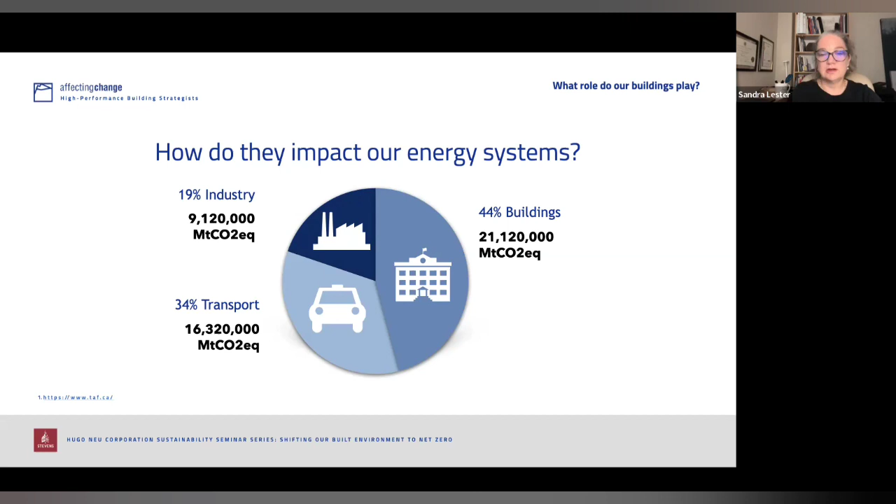If we look on a global scale, the urban built environment is actually responsible for 75% of the annual global greenhouse gas emissions. And that's the built environment itself. Buildings alone account for 39% of the emissions globally. So that's a huge building footprint, but it's also a huge opportunity.

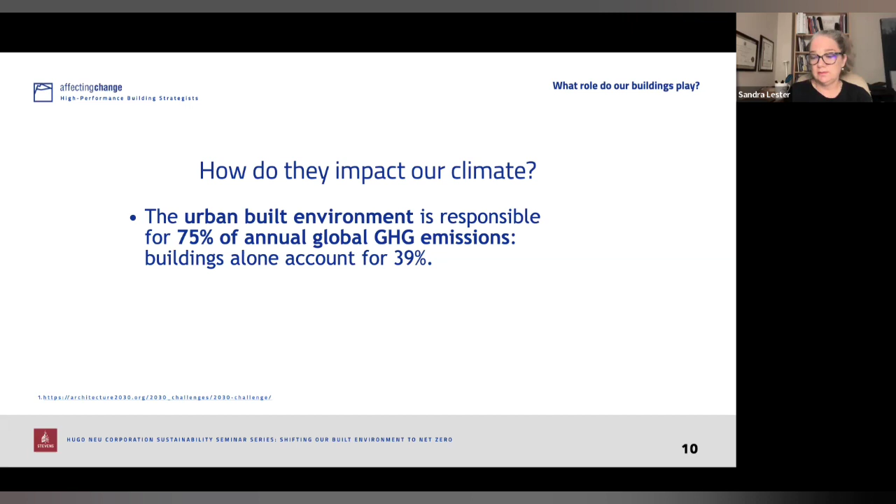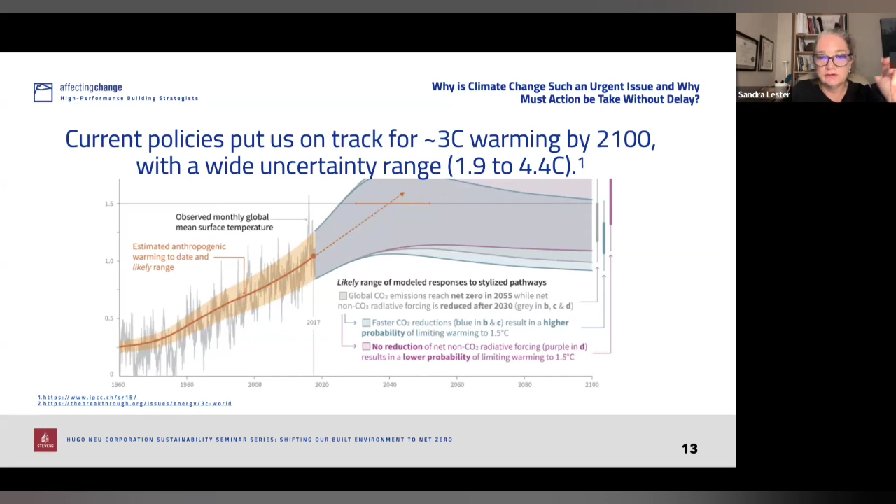And going back to the climate, just think about that path that we were on. And I'll just go back to that image. Think about that path that we are on. We have to reduce emissions so that we don't continue on track for that 3 degrees of warming by 2100. We've had many, many experts say that humanity will not survive a climate that is warming by more than 2.5 degrees. Some say even 1.5 degrees of warming.

So if we think about the continuation of existing buildings to pollute into our environment, they contribute to this ever-growing gap between the current emissions track that we're on and what we need to limit the warming below 2 degrees Celsius. And with every year of continued emissions growth and every building that gets built that is not efficient, that could be 90% more efficient, it increases the amount of fossil fuels used. And we need to increase the amount of clean energy in order to offset that.

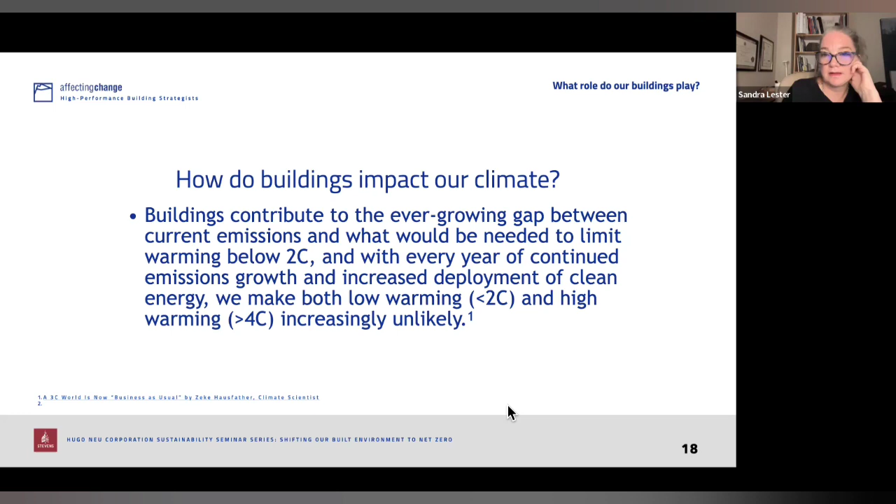So it really makes that low amount of warming under 2 degrees unlikely, and the high amount of warming likely. And I should change the wording on that slide. I will change it before I submit a final PDF for record. But yes, it's making it very unlikely that we will decrease our trajectory towards that 4 degrees of warming.

So what can we do to reduce the impact of our buildings? Well, we need to look at our existing buildings and how they can be reduced so that we can meet our emission reduction targets. Plus, retrofits make financial sense. There's really good returns on investment over the long term of doing a retrofit. We can also help by evaluating buildings and real estate portfolios to create strategies to reduce the energy use and reduce their climate impact.

We're experts at putting together strategies for real estate portfolios. And what it means is that you figure out a benchmark for everything, and then you tackle the energy pigs on the portfolio, and you tackle the buildings that have deferred maintenance, and you look at combining them all together.

And when it comes to energy use, I want you to have this idea. I want you to really understand that we can't just slap renewables on the roof and have the building net zero. Because the building is using 90% more energy than it actually needs to use, renewable energy systems are not going to have enough impact on that.

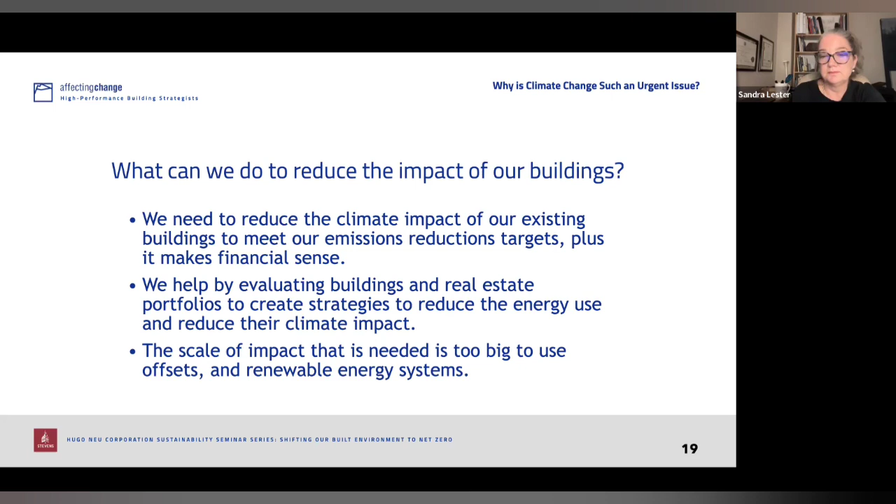So how do we retrofit buildings? What do we need to keep in mind when we're doing so? It has to be economical. So where are you going to get the capital? Are there deferred maintenance issues that you should address at the same time? What type of procurement method will you use? Is it going to be more like an ESCO or an energy service contract? Or are you going to do construction management? Or is it going to be a lump sum bid? And how will you get a competitive bid for this work?

The procurement process is really in its pioneering days, and we have a lot of experience working with organizations that want to do retrofits on a portfolio of buildings. We were able to help the City of Toronto's Toronto Community Housing Corporation that owns a portfolio of buildings, and we wrote their prototype RFP for the retrofit of 7 buildings on 4 different sites.

And they were able to get a competitive bid for the work, and they hit a lot of energy savings for that work, and we won a Clean 50 top project award for that work in 2021. So it was really prototyping how to get competitive bids, and that work hasn't been brought into the commercial market yet, and we're just about to do so.

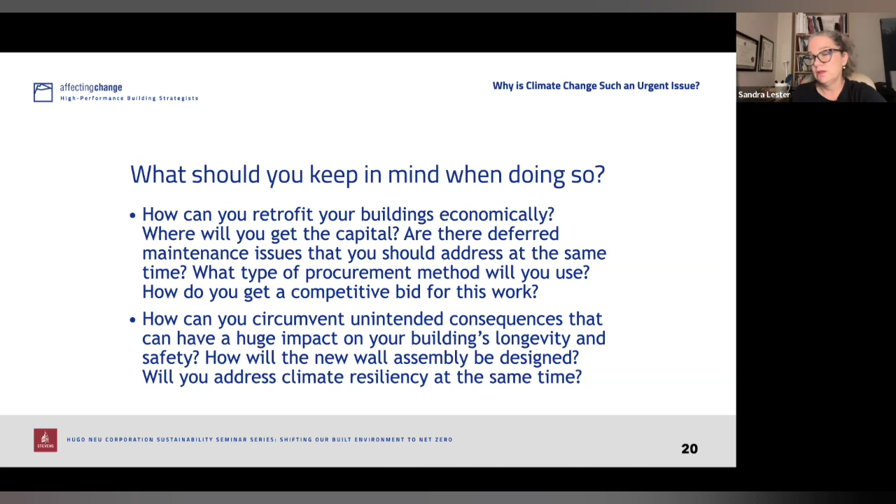Climate resiliency could be anything from what level of filtration is put into the air system of your buildings to address viral transmissions, to the robustness of the structure and whether it can withstand the increasing rate and intensity of storms that are coming.

And how do you move a portfolio of buildings to net zero? It becomes really complicated. So I'm going to talk about what I discovered working on a portfolio of buildings a few years ago for Perkins & Will Architects in Colleges Ontario. I'm going to talk about deep synergistic retrofits, and I'm going to talk about zero carbon buildings.

So I was working for Colleges Ontario through Perkins & Will Architects, and we had all of the building managers put together a whole assessment process of what retrofits they had done in the past, what energy their buildings are using, and we put together a database of retrofits and their cost per ton of carbon.

And then we wanted to inform the carbon market that was going on in Ontario. There's a public carbon market, and the funds that were being collected in the carbon market were being redistributed by the Ministry of Environment and Climate Change. And we had $500 million to distribute to colleges and universities in Ontario. And they were trying to decide how to distribute and how to award that money.

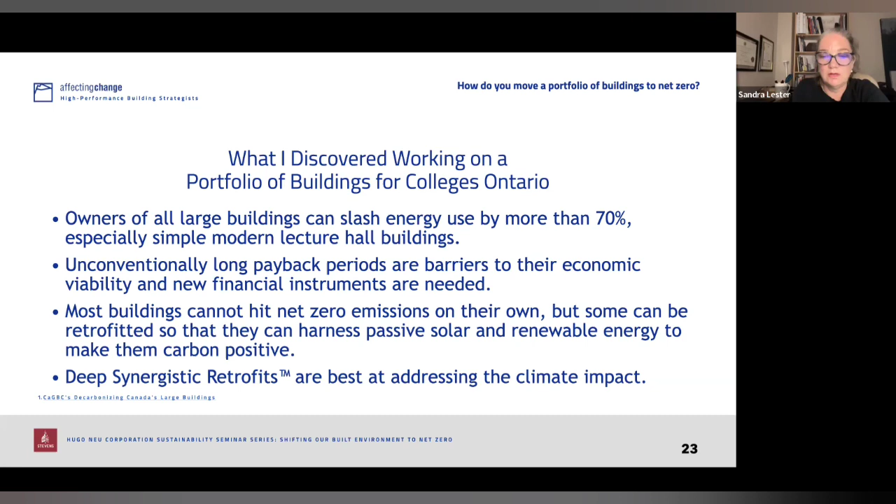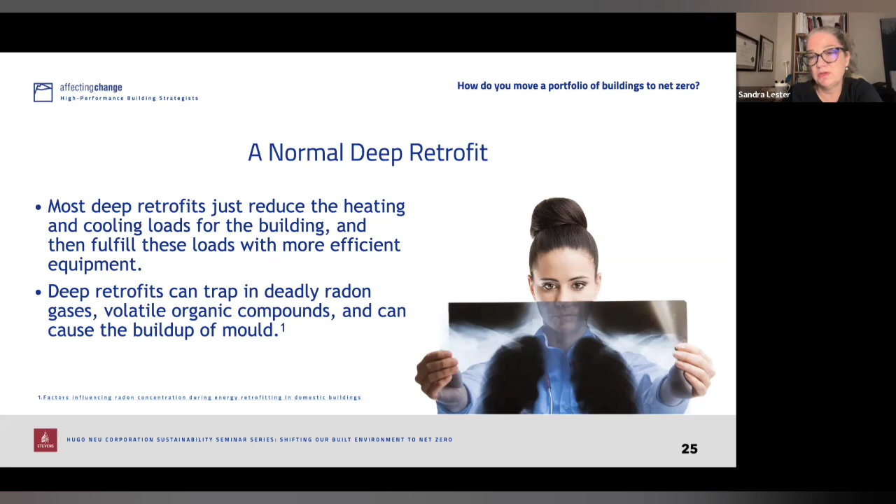And then lastly, deep synergistic retrofits are best at addressing the climate impact, and I'll explain what those are. That's a phrase that I came up with a few years ago. So what is a deep synergistic retrofit? A normal deep retrofit is just reducing the heating and cooling loads for the building and then fulfilling those loads with more efficient equipment. So a normal deep retrofit can trap in deadly radon gases, volatile organic compounds, and cause the buildup of mold. It can also have those unintended consequences that I spoke about previously about the building's longevity and the climate resiliency.

And this section is about zero carbon buildings. So if you look at new buildings, what you want to do is design a building so that it is zero carbon. And I thought it was really useful for you guys to have a definition of that. So zero carbon buildings have a significantly lower embedded carbon footprint. As you get buildings that have lower operational carbon, the embodied or embedded carbon becomes a bigger portion of the overall carbon footprint. So this is becoming increasingly important.

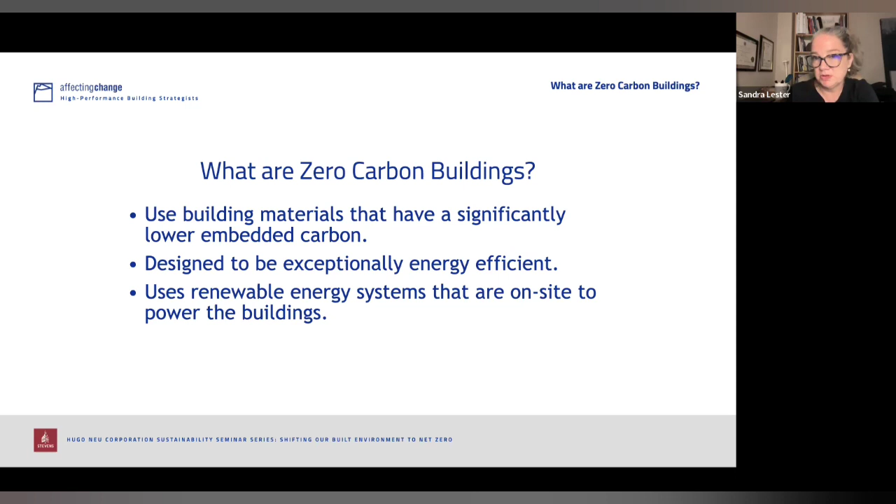Is LEED the best rating system? The USGBC's LEED Green Building Rating System has been very popular. It has reduced the carbon footprint and ecosystem impacts of millions of square feet of projects around the world. I've personally worked on probably over 40 LEED projects. But it also has blind spots. So I wanted to talk about the blind spot today in measuring energy savings. LEED uses a comparative energy savings according to ASHRAE 90.1. And because of this, the highest rating of LEED will not guarantee that the design will align to the climate reduction targets of 1.5 degrees Celsius of warming. And I'm bringing all of our conversations back to climate change and that amount of warming, because it's really the amount of risk there is to humanity being able to continue multiple generations from now.

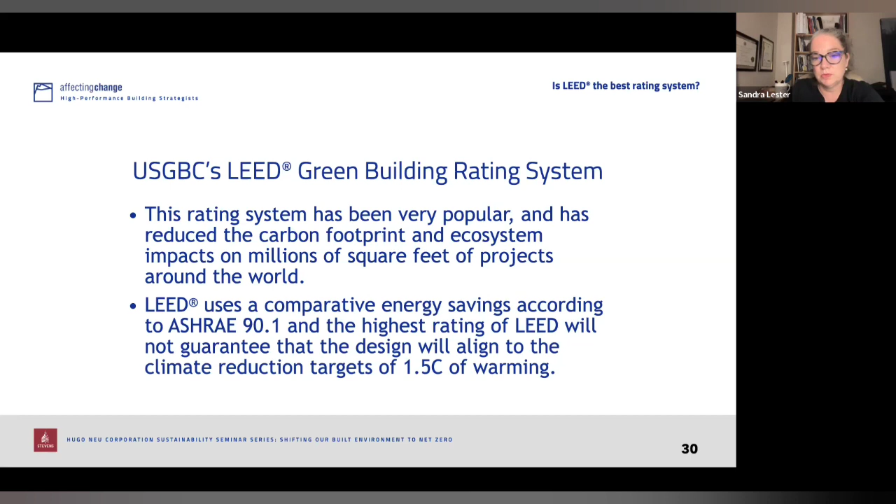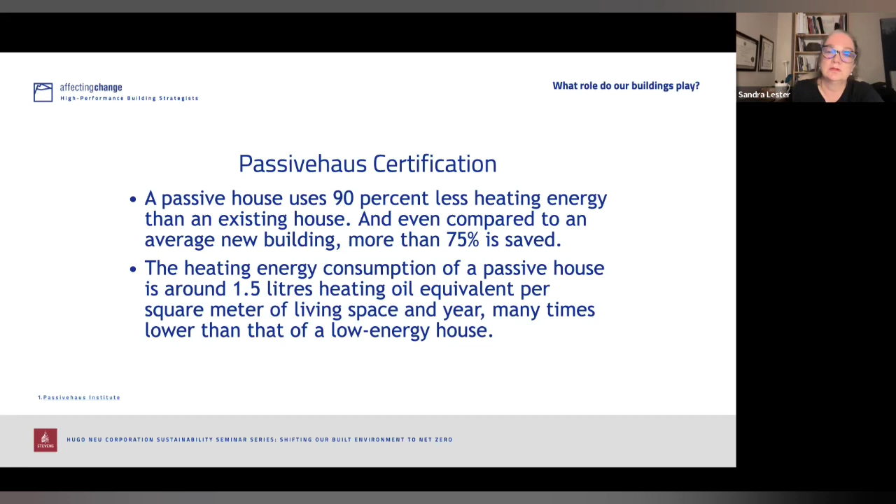There is a standard for retrofits called the Passivehaus EnerPhit Standard. It has a very ambitious energy use intensity target. Continuous insulation is used in that retrofit, like a blanket, to eliminate the heating and cooling loads. They also eliminate the thermal bridges. Thermal bridges are pathways for heat to find their way out of the building. And the heat will go in the path of the least resistance, and usually along the pathway of something metal.

Passive house retrofits are designed using an airtight building layer. So there's a layer of airtightness that's put in that wrap of continuous insulation. And they also use vapor barriers as a separate layer. The components need to be certified. They need to be high performance passive house certified windows and doors. We usually put in 100% fresh air ventilation and heat recovery. And we use passive house certified heating and cooling components.

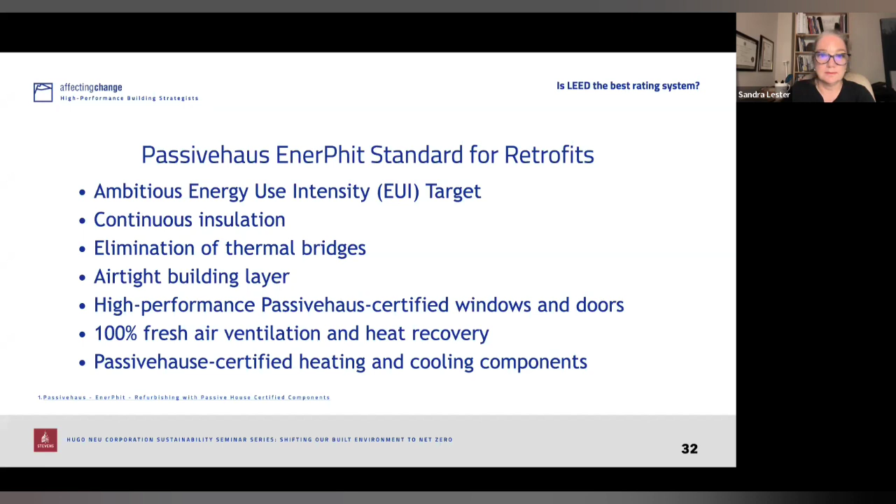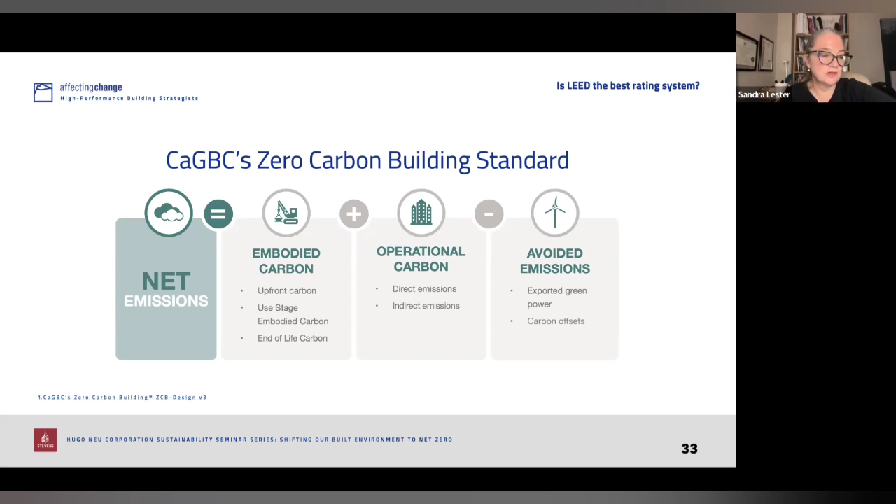The Canada Green Building Council has come out with their zero carbon building standard, and it's in version 3 at the moment. So they look at the net emissions of embodied or embedded carbon, the operational carbon from how efficient the building is operating, and then the avoided emissions. And I'm not quite in agreement with the avoided emissions because they include the purchase of green power and carbon offsets.

I also thought it would be important to bring to mind the Zero Tool EUI calculator. Back to the car that's 90% less efficient than its competitor. It was really important for architects to realize how inefficient their buildings are when it comes to climate change. So there was an organization called Architecture 2030 that was established, and they issued the 2030 challenge in 2006. And this was a request for the global architecture and building community to step up and adopt EUI targets for their buildings and commit to designing all new buildings, developments, and major renovations as carbon neutral by 2030.

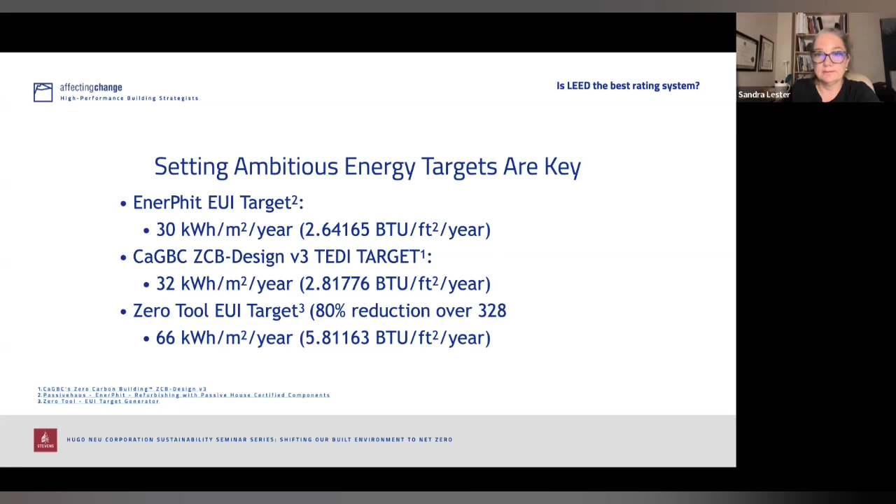So just to wrap up the talk and give you some tips if you're ever working on a project with a company, maybe an organization has a portfolio of buildings. Use a green building strategist. Doesn't have to be me, but find somebody that's qualified. They should be a certified passive house designer, because if you know that extreme level of performance, it's such a high level of performance. It's an amazing system. If they know all of those tools and green building strategies, then it's easy to do everything else. It's easy to achieve lower targets. So always use a certified passive house designer on your projects.

Do a portfolio analysis, like find those energy pigs and plan retrofits and look at alternative financing measures for those retrofits. Do a deep synergistic retrofit feasibility study. Find out what the potential is. I looked at a century-old warehouse building, and the potential was 80% savings and a 30-year payback. And they're currently vying for both a deep retrofit competition that the City of Toronto is holding right now, and also some grants. So you don't know what is possible until you do that feasibility study and that deep analysis.